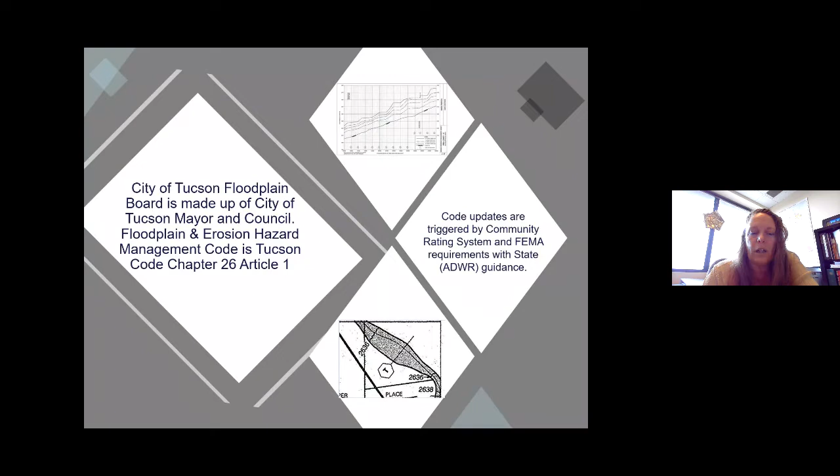Hi, everybody. Thank you for taking time out this evening to be with us. We wanted to bring you some information that we hope will be helpful to you. My name is Fred Felix. I'm the city engineer for the City of Tucson.

I'm also the floodplain administrator, and all drainage planning, design, construction, and maintenance of urban drainage within our community goes to the Department of Transportation and Mobility. We partner with the Pima County Flood Control District to develop regional projects that will help reduce stormwater discharge to streets and washes. Some people say we live in a desert. Why should we even worry about that?

But if you've been around here long enough, you know that when it rains, it pours. And there's an old saying that if you don't like the weather, all you have to do is drive a couple of blocks. That's very unique to the desert. Our streets do get flooded. We don't have a whole lot of infrastructure, so we do rely on streets to carry drainage, and it's something that we try to control.

We report to the mayor and city council, as they are the floodplain board. They approve all changes and regulations that affect our community and quality of life. But the regulations that we adopt have been established by the Federal Emergency Management Agency. You know them as FEMA. The City of Tucson has been part of the floodplain insurance program since the early 1980s, and it makes it possible for the federal government to provide disaster assistance to our residents.

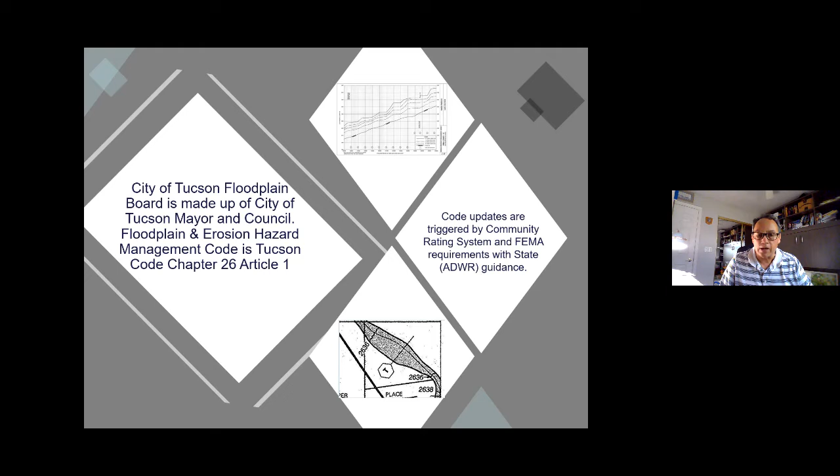I work for the Department of Transportation as engineering manager. I'll go through the proposed updates to the Tucson City Code, our floodplain ordinance, chapter 26, and then we can go through Q&A if there are questions on the clarifications. Most of the changes are clarifications or updates to the code that are a long time coming. There are a couple changes directly related to our community rating system, making sure we have updates to our minimum mandatory language so we can keep the code up to date with current FEMA requirements.

The first update we're proposing is to update the critical facility definition within the City of Tucson floodplain ordinance. This is to clarify the minimum elevation of critical facilities within the city. It's a bit of a change in the elevation requirement compared to the current standard, however it's minimum language that we need to be providing.

The second change is to add the definition of a levee into our floodplain ordinance. We currently don't have levee defined. As Elizabeth mentioned, we're proposing a levee maintenance manual, so the definition, use, and functionality of the levee is being included in the floodplain ordinance to match the proposed levee manual.

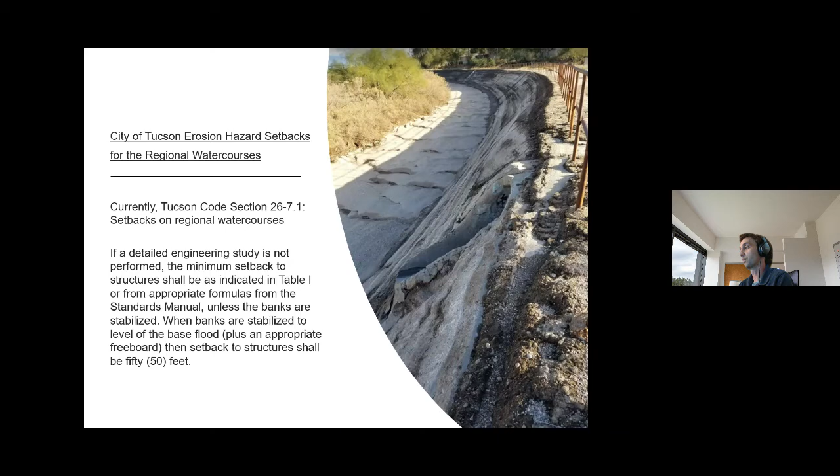Our floodplain ordinance specifies certain minimum erosion hazard setbacks, and these modifications are targeted towards the minimum setbacks for our major regional water courses within the City of Tucson - that's the Rillito, the Santa Cruz, and the Pantano. So we are proposing to update the minimum erosion hazard setback based on increased flow values in the rivers since the original ordinance was written, updating that based on current flow values within those rivers.

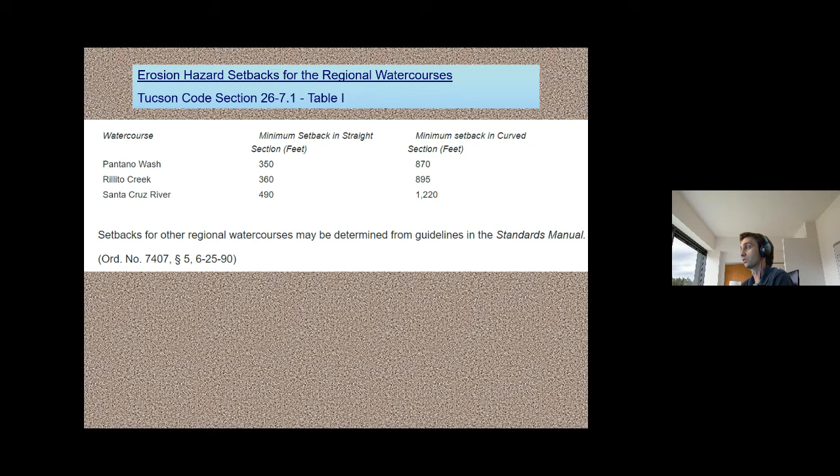And the second is to remove the option of decreasing the erosion hazard setback for the regional water courses in the City of Tucson, removing that as an option and placing that in the variance section of the Tucson City Code. So it's an increase in the stringency of those standards, which we feel is important to protect property.

Let's see here. Okay, so next slide, Elizabeth. So as I mentioned, this is going to be shifting the design requirements for erosion hazard setback to be a variance as stated in the city code. And this is a recap of the updates I provided earlier: definition of repetitive loss property, definition of levee, and the freeboard of certain utilities, and increasing that definition.

There are 3 additional updates to this. One of them is to remove the developed area or density thresholds for new development for detention and retention, and have those requirements be stated in the stormwater detention retention manual, which is where the design requirements for those types of systems are found.

And then the other change is to add to the variance section a line of minimum requirements that would have to be met in order to reduce an erosion hazard setback.

And the final change that we're proposing is a notification process for amendments or variances to the code that have to follow a notification process from the department directors through what we have as a stormwater advisory committee. And so we're proposing updating some of the regulatory language on how that advisory committee is being convened.

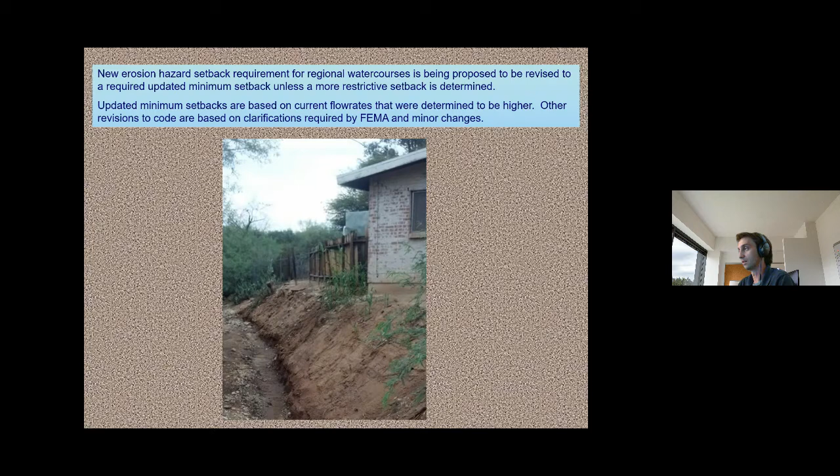So with that, that's a very quick run through of the proposed changes. And I believe that that's the end of my slides, Elizabeth.

And so with that, I would like to introduce Peter McLaughlin, who will start discussing the floodplain management plan updates. Thank you, John. I'm Peter McLaughlin with the entitlement section of Planning and Development Services.

I'll start with a little background, which might be especially helpful for those of you who are not involved in the floodplain management plan process 4 years ago. The 4-year anniversary of the adoption of the floodplain management plan was actually last week. The mayor and council adopted the FMP on August 9th of 2016, so just a little over 4 years ago. And it's essentially phase 5 of the Tucson stormwater management study.

The floodplain management plan is updated on an annual basis, with a formal review and update to take place every 5 years. So keep in mind that this is an update to the floodplain management plan. Last year, the Floodplain Management Plan Committee determined that the formal update would take place in 2020. That's actually a little ahead of the 5-year schedule, but these days you want to get things done, so that's why we're moving on it in 2020.

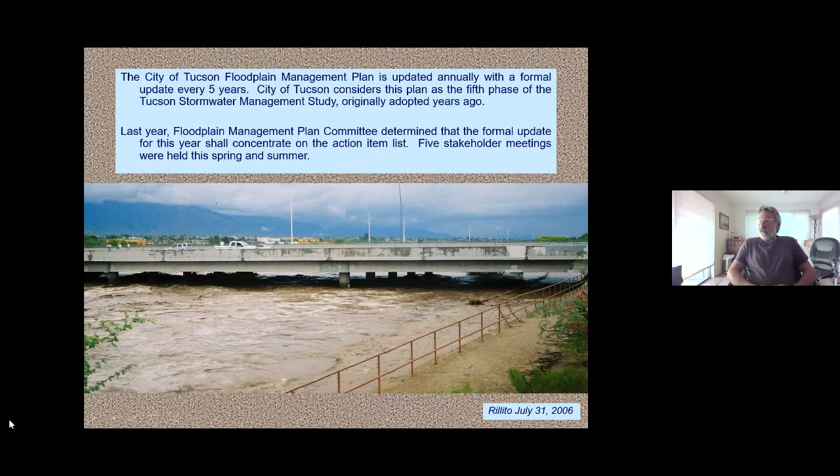There were 5 stakeholder meetings held earlier this year in the spring and summer of 2020. The first meeting was actually live, and subsequent meetings were held virtually, of course, as we're doing here now today.

At the first meeting, the actual face-to-face meeting, there was a poll taken, and the outcome was that we would focus on revisions or updates to the action item list in the floodplain management plan.

And today we're holding our first of the 2 final meetings prior to taking this to adoption in September. September 22nd is the scheduled mayor and council meeting date for the update adoption, so that's just a little over a month away. So today and tomorrow will be the final of the 2 meetings for input and a chance to have access to the update and revision with feedback prior to the projected readoption scheduled on September 22nd.

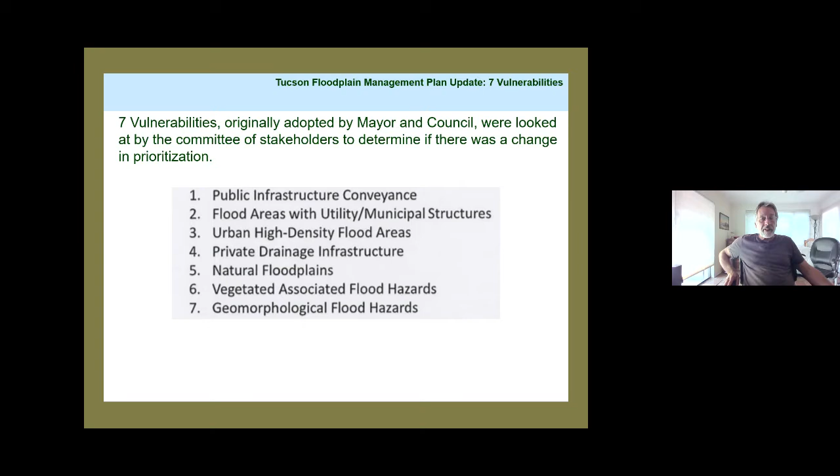I guess that was my last slide. Is that right, Elizabeth? Yes.

I think you're muted, Elizabeth. Sorry about that, I'm here.

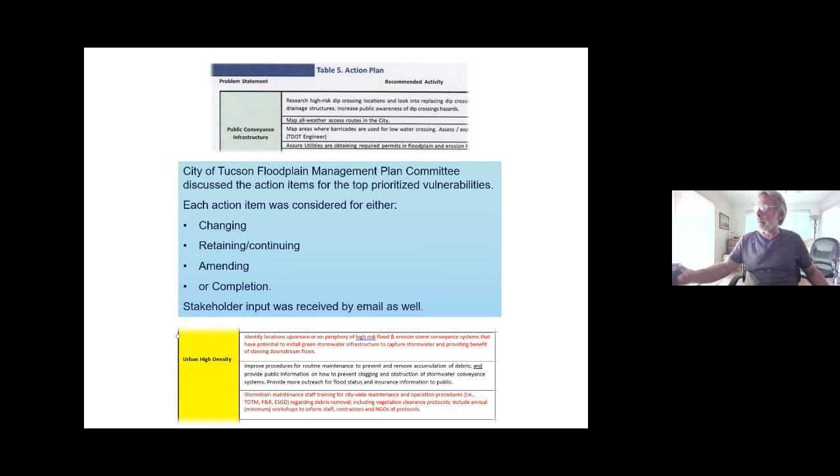The floodplain management plan committee discussed primarily the action items in the plan. In our last annual meeting, it was decided that this was going to be the focus of the Tucson floodplain management plan update, the action items. We started going over those in our committee meetings, and we ended up having feedback sent in on the 7 categories, and many of the proposals for the amendments and changes are incorporated.

Each of the action items were considered for either a change or to continue the action item. If the action item is still a good item, doesn't need amending, but we wanted to continue the project or the action item. And then we also had amendments to some of these action items. And then some of the items were considered completed.

The plan itself provides a path forward for the city, to the mayor and council, to direct our flood and erosion hazard management in the city. It also identifies key projects and studies that should be prioritized for flood mitigation and other action items. And it also helps the general public understand our unique characteristics of floodplain and erosion hazards.

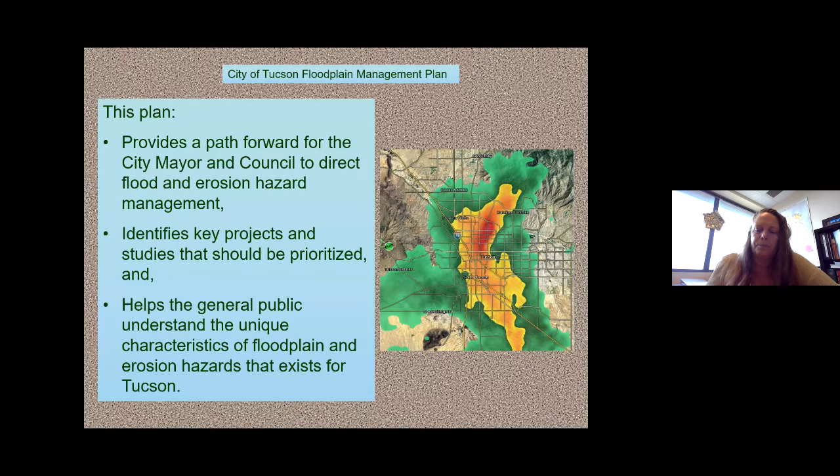I'm now going to turn it over to Craig Saltzman, who's going to go over our new levee maintenance manual.

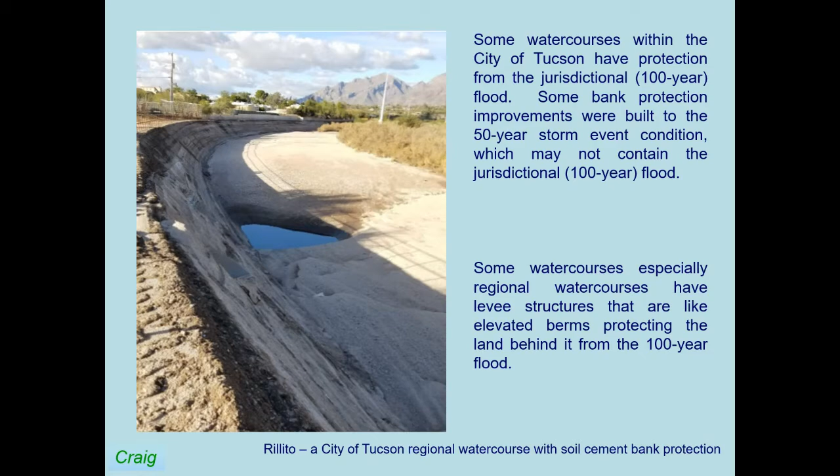Some watercourses within the city of Tucson have protection from the jurisdictional 100-year flood. Some bank protection improvements were built to the 50-year storm event condition, which may not contain the jurisdictional 100-year flood. Some watercourses, especially regional watercourses, have levee structures that are like elevated berms protecting the land behind them from the 100-year flood.

Classic levees are constructed with soil cement or concrete-covered earthen material to create a berm to keep floodwaters from inundating an area during a jurisdictional flood event.

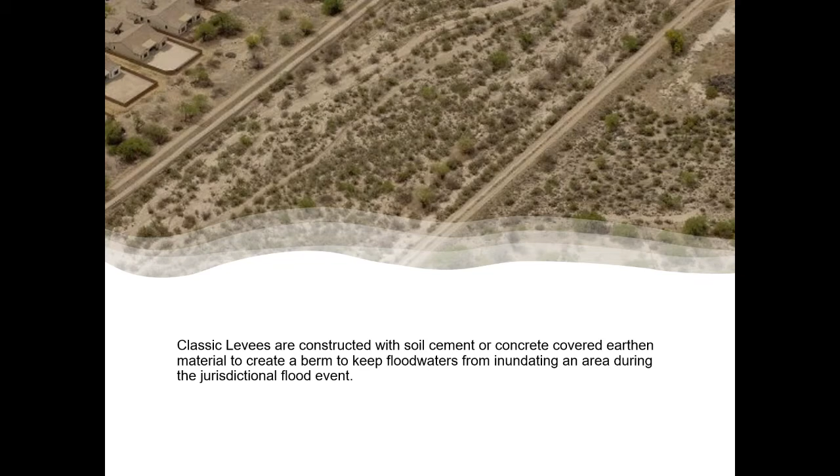The Tucson Levee Manual provides maintenance procedures for existing levees within the city of Tucson. The primary purpose of this manual is for maintenance, although it was created to comply with FEMA levee regulations and guidelines, and provide requirements and procedures for levee inspection, levee inventory, levee design, and levee survey, specifically for levees within the city of Tucson.

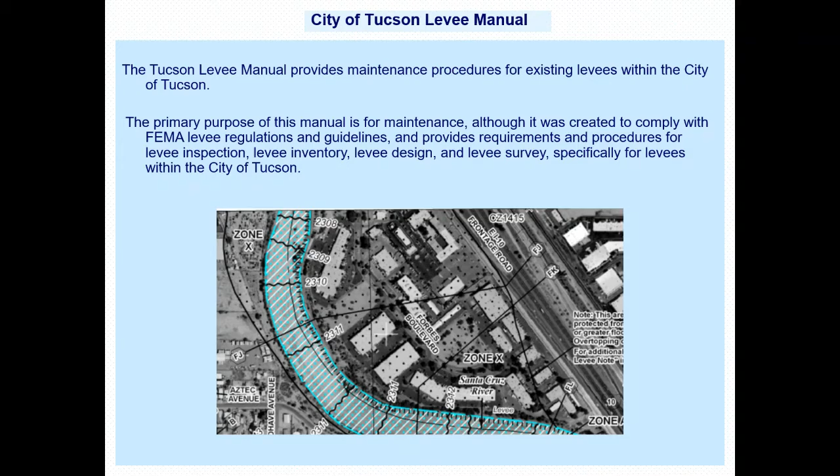The levee manual document will be presented to the City of Tucson Mayor and Council, who act as the city's floodplain board, for their consideration and adoption. We anticipate approval of this document.

City staff developed this document based on Army Corps of Engineers levee inspection procedures, with consideration of the Pima County Regional Flood Control District levee checklist. Any questions can be directed to me or the city floodplain administrator at the end of the presentations.

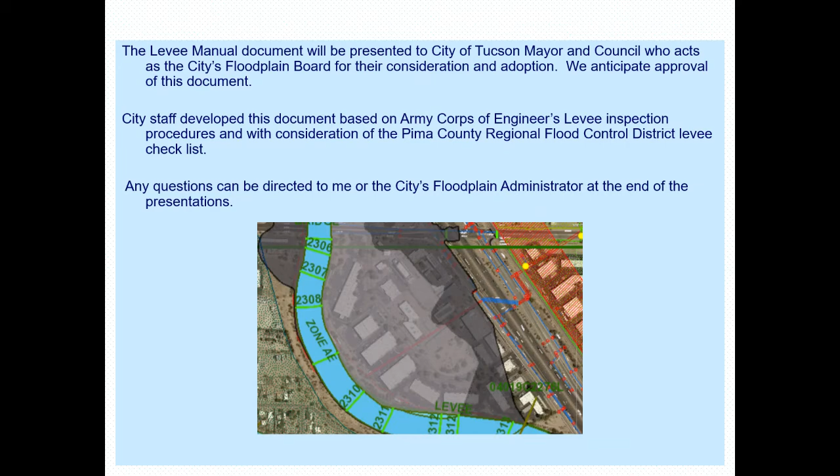At this time, I would like to introduce Patrick Hartley, Transportation Program Coordinator, who will be presenting Move Tucson. Thank you, Craig. Good evening everyone, and thanks for joining us to learn about the plan update. I'm going to give you a brief update on where we are with the Move Tucson planning process.

For those of you who may be unaware, Move Tucson is the city's currently under-development 20-year master transportation plan. We're about halfway through the process right now.

We have wrapped up the first phase of public engagement as of August 7th of this year, and I'm pleased to announce that we received about 4,500 surveys through that process and garnered roughly 800 individual project ideas from the public. As we've closed phase one, now what we're doing is really analyzing those results and using that input to develop a project list that we're going to be bringing back to the public.

Now, as we develop projects, we've got a couple things in mind that we're looking at. The first is we want to make sure that we're working with the Regional Transportation Authority, and we are on track to ultimately submit a project list to the RTA by November 30th of this year.

As we go through this project development process for Move Tucson, one of the things that we're going to keep in mind is looking at how we can maximize the benefits for our transportation mobility improvements and how they really integrate with floodplain management, looking at making sure that we're recognizing the drainage needs of the individual projects and incorporating the appropriate project scopes as we develop them, so that we can understand the full cost of the projects and make sure that we are maximizing the benefits of those investments.

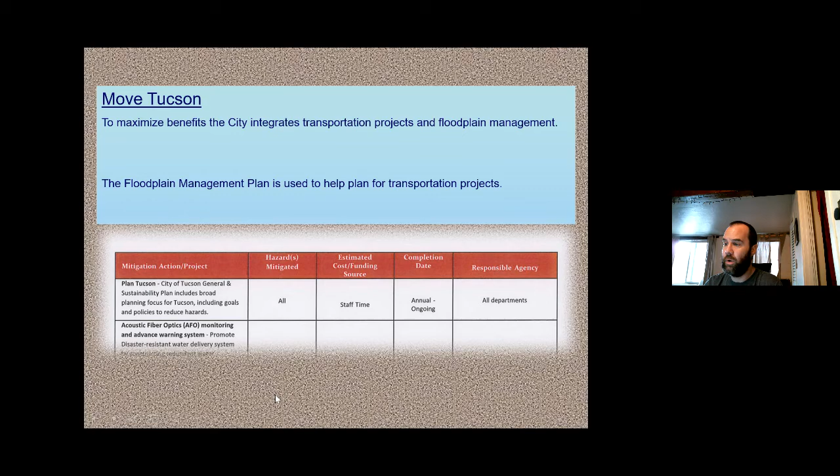If you'd like more information about the Move Tucson process, please visit movetucson.org. We'll be updating the website shortly to share the results from the phase one public engagement. With that, I think we're going to be opening up to questions and comments, and I would like to turn it back to Elizabeth, who can field those. Thank you very much, everyone.

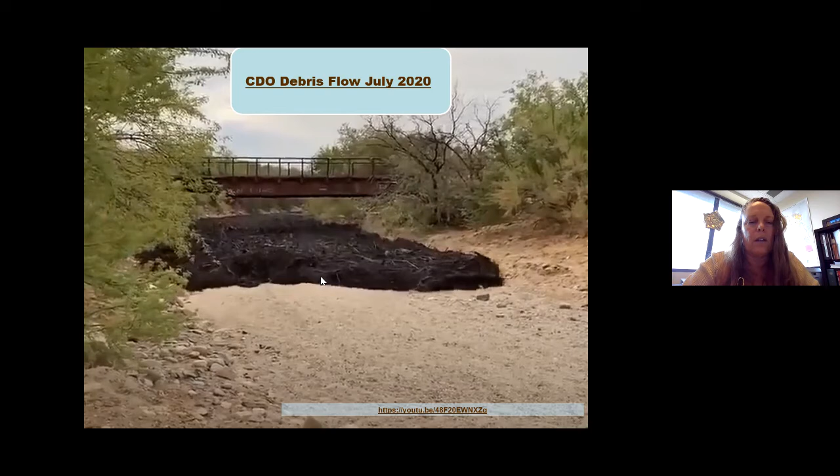Let me go back to our presentation. We also have another presentation about... oops, let me just turn this on, right back.

So those are our two videos, and I'm hoping that you guys were able to see that.